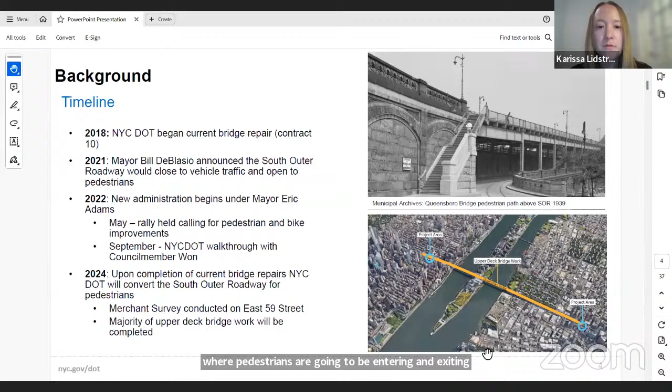The street level improvements are really about certain goals and objectives we have for those. Some of them are creating a pedestrian network that is accessible, safe, and convenient.

While we're not relocating where bikes will access the North Outer Roadway, we do want to think about the existing bike network and any enhancements that can be made. We also want to think about local access to these streets for businesses, residents, and any city facilities along these routes.

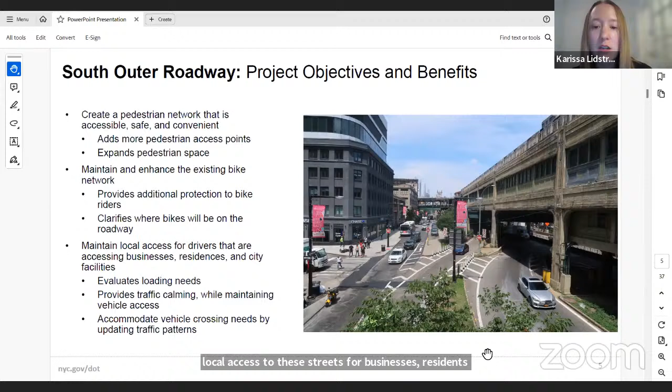We also have about 2,800 people who walk over the bridge daily. That number might be higher if the conditions felt more comfortable to walk across.

The South Outer Roadway currently has one travel lane taking vehicles, primarily passenger vehicles, because there is a height restriction from Manhattan to Queens. The number of vehicles that use this route per day is about 8,000, which is actually less than the combined total of pedestrians and bikes using the North Outer Roadway.

Now we'll take you into the existing conditions on the Manhattan side before getting into our proposal.

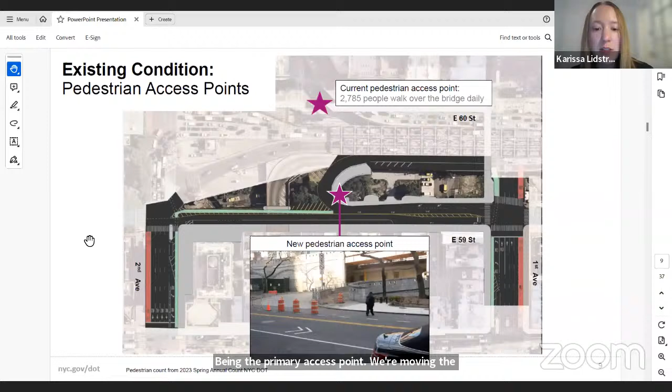Let me orient you a little bit to this. We're looking at a plan view, mostly of East 59th Street, bordered on the right-hand side by First Avenue, and on the left by Second Avenue. Currently the pedestrian access for the bridge is on East 60th Street, and with the South Outer Roadway being the primary access point, we're moving the pedestrian entrance to East 59th Street. You can see a photo of that existing condition today.

Taking a closer look at the sidewalk conditions, we do have some narrow sidewalk widths per our pedestrian mobility plan guidelines. Currently they're about 15 feet, but it depends on where you're walking along the sidewalk and what street furniture or permanent objects protrude from the building line, like stairs. Because we have only one continuous sidewalk along the south edge, that creates one crossing for pedestrians at Second Avenue, which facilitates a busy intersection since that's the only pedestrian crossing.

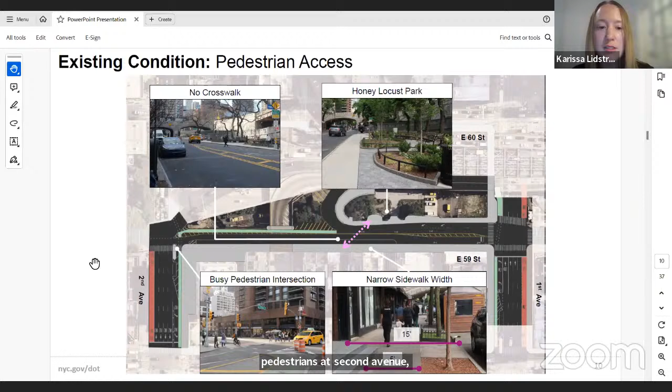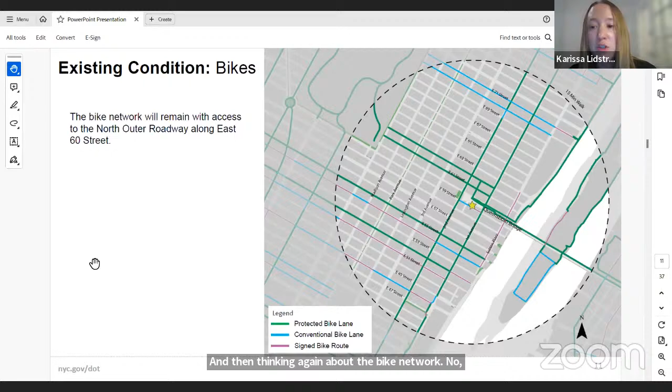Thinking again about the bike network, we're not relocating where bikes enter the bridge, but we want to be thinking about the existing network and enhancements that can be made. Looking at existing conditions, there's a high number of bikes that use 59th Street to access southbound Second Avenue. Instead of coming down at the mouth of the bridge, bikes will take 60th to First, then 59th to Second. Current conditions along 59th Street for bikes involve a shared travel lane between bikes and vehicles accessing the South Outer Roadway.

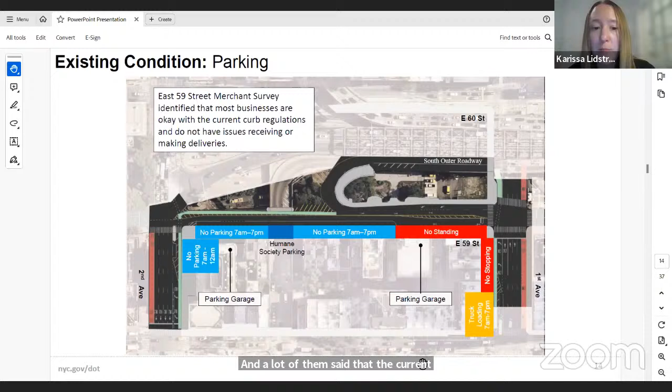All right, so now we are going to transition into our proposal.

Looking at 59th Street, I want to start by pointing out some of the pedestrian improvements we're making. As I mentioned, the sidewalk doesn't go all the way between First and Second Avenue on the north side, so we want to install a painted sidewalk along the northern curb of 59th Street. When pedestrians come off the South Outer Roadway, they'll use this concrete sidewalk facility, and then as they exit, they'll have a choice to go to Second Avenue or First Avenue. We want to create a facility for them.

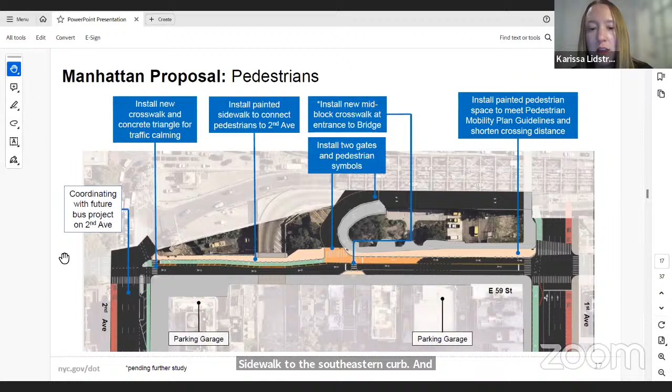We're also exploring a mid-block crossing at the entry/exit point of the bridge, located here, and a crossing over at Second Avenue to get from the new painted sidewalk to the southeastern curb. Because the eastbound direction is already low volume, we want to facilitate this as a local access route and a low volume street. We also want to add a few traffic calming elements at the entrance to Second Avenue by building a small concrete triangle, and adding a painted curb extension mid-block as well.

And then taking a look at both the bike and vehicle improvements along the route. With the South Outer Roadway closed, we can remove the left turn bay that's currently on First Avenue and widen the existing bike lane on First Avenue, and also extend the truck loading that's there. Because the street will be a lower volume street with this turn, we are keeping it two-way up until the parking garage.

After that, the orange color highlighted here will be a shared space between authorized vehicles only and bikes. As I mentioned before, there are three DOT facilities along the northern curbs, so we still want to have access there. Our bridges team at DOT will be installing a gate here for their maintenance access, and also to prevent vehicles from using the South Outer Roadway.

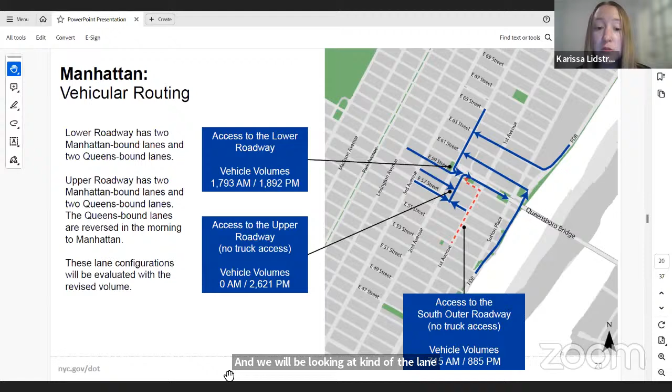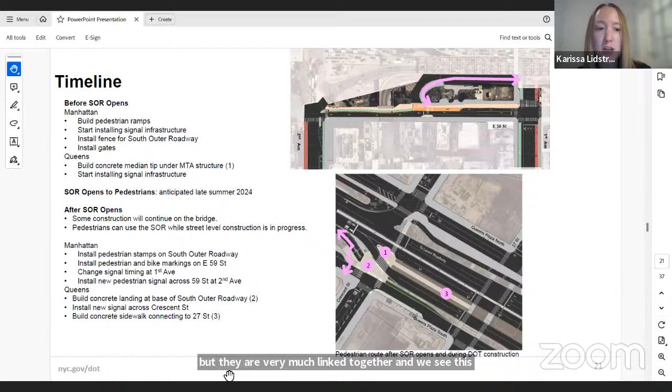This goes into a little bit about the Queens side of the bridge proposal, as well as the Manhattan side, but they are very much linked together, and we see this all as one holistic project. And that's our proposal.

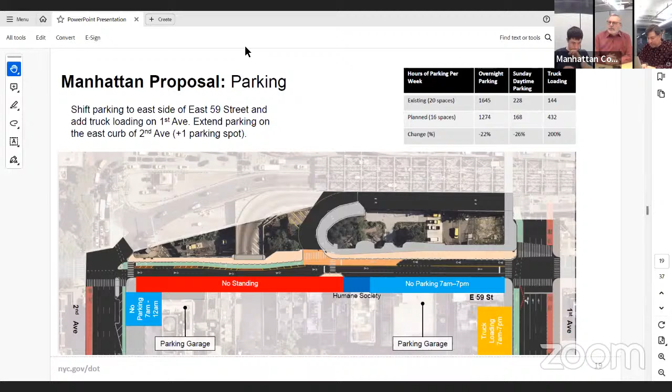It may be used now for some bridge maintenance, but it might be worth taking a look at some portion of that area that could be repurposed for creating a large facility for the deliveristas to recharge and be out of the elements. It's sheltered, and it might actually serve multiple functions in addition to what it's currently being used for.

Okay, maybe you can send me the exact location or a screenshot of the photo, and we can probably have a walkthrough of it. All right, you can see it. Karissa, it looks like you're acknowledging it.

Are you talking about right over here, where you go up the south outer roadway, and then right where the garage is? When you have that picture with the trolley track from 1911, you can see the place where one trolley track comes up the ramp, and the other one comes out of the garage.

Right, yes, our bridges team does use that facility for maintenance and storing vehicles and different elements. Yeah, we do have a bridge facility in that area. They do use that.

So the question is this: is it conceivable, since that's going to continue to be used and you're going to have to manage getting vehicles in and out of there somehow without interfering with the bikes, that you could discuss this? Larry, we can look at various options. Let's look at this and we'll definitely get back to the community board.

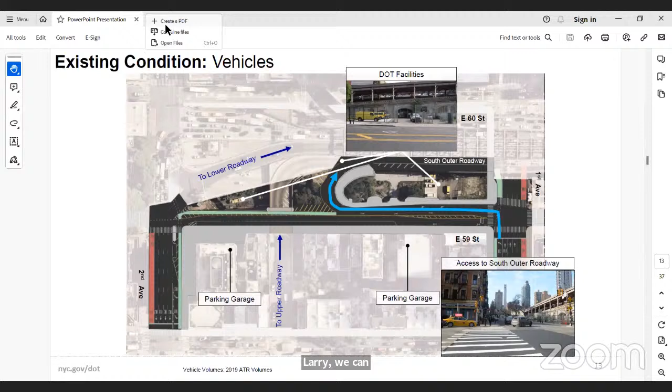Larry, so you're saying use that for deliveristas to rest area? Well, there are two things. One, you have this garage door, this maintenance facility. Nothing's been mentioned about how that function will interact with the pedestrians coming up and down off the bridge. So I think they did.

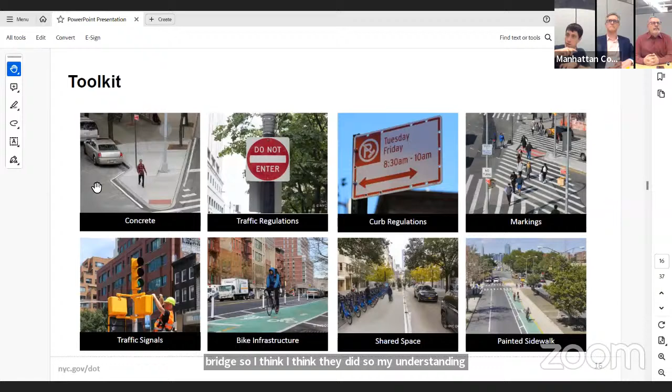So my understanding is you've got that sidewalk path, the gray area, and that's going to be the entry point for pedestrians. That gets you past the door, the entryway. Where the gray area ends, it comes around the ramp to the right. You see that blue dot?

Okay, so that's our... there's a white line, that's the garage door. No, the garage door's back behind that. No, that's where it's over here. The garage door is, oh sorry, yes, not where the blue dot is, where the outline ends. The garage is to the left of that vertical white line there.

No, I don't, sorry, hold on. Can you see my cursor? The garage door is here, and then this new gate that our bridges team will be installing as part of the project.

So pedestrians will actually be accessing the space you see here, and then they'll be directed to use the current concrete sidewalk path that goes up. Okay, focus on the new gate. My question here, first question is, how will service vehicles get in and out of that garage if this ramp is shut off?

So there's going to be the gate here as well as down here. Our DOT vehicles will pull up to the gate, they'll have to move it, and then they'll bring their vehicles up the existing ramp. So I'm assuming that's the roadway, and then the pedestrian area is the grayish space to the right of the ramp.

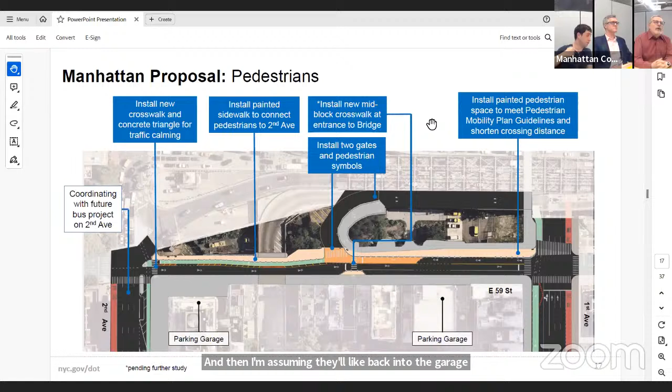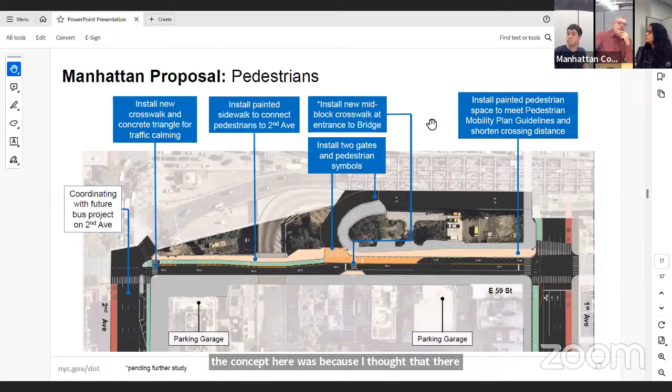Okay, because I completely misunderstood what the concept here was. I thought that there was a retaining wall on the right side of the ramp as you came up, and there isn't any space where that gray area is. Let me go back. Do you have a photograph? Yeah, I think there was a picture. Where's the SOR photo?

This one. So this is going to be the new pedestrian path, or it's existing? Oh, okay, so I didn't realize this is the retaining wall I think you're mentioning, and then Honey Locust Park is literally right here. Okay, so there's the ramp, the driving ramp, and then there's a walkway, which I hadn't viewed before.

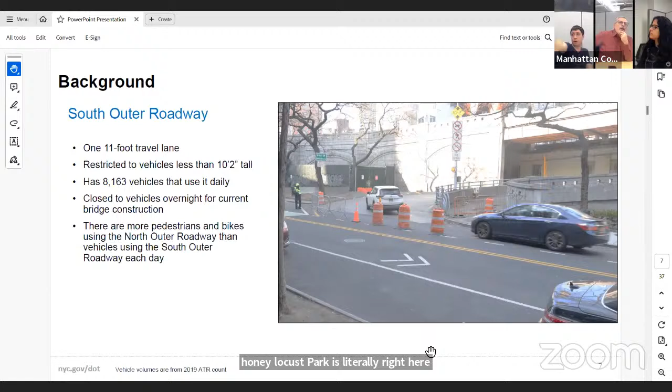Yeah, so that's still going to be a roadway up to allow access for that garage. Okay, but it's not only for... but there'll be a gate right here in the future. But what I'm asking you to do is, and now I'm rejiggering it in my head...

...is still consider the possibility of allowing the deliveristas to use that vehicular ramp to come up, and if there's space, maybe even outside of the garage, but between the new gate and the garage door, to have some sort of place to hang out.

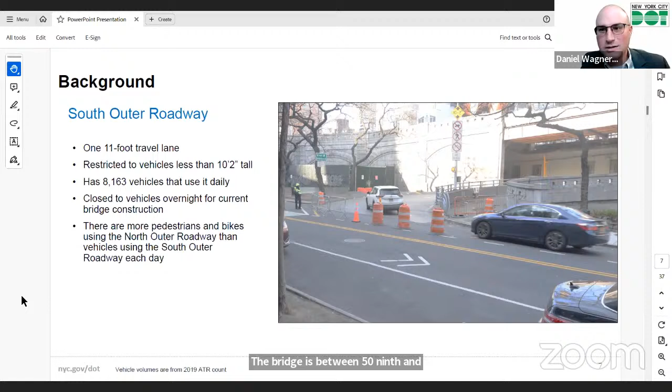We can take that back to our bridges folks and see how they would respond to that proposal. But I do want to point out that you were asking for a Deliveristas hub in your district, and that is not in your district, that's in CB8. Well, the south side of the bridge is in our district. The boundary is 59th Street, and the bridge is between 59th and 60th Street. I mean, it's nothing really in terms of a deliverista needing rest and respite. But if you still want one in your district, I don't think that would solve it.

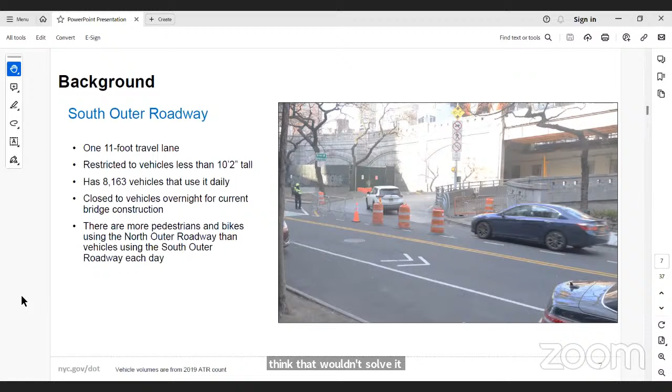Yeah, why not both? We're happy to take this back and work with the community board to find suitable locations for the deliveristas. So let's continue the conversation with that. Listen, this was just a brainstorming idea, not a concrete proposal. We don't know if it's feasible. Okay, let's move on. Okay, I'll come back later.

Hey Carissa, thank you, it's a great presentation. I just wanted to comment on the 11-foot width of the north lane. I went out and measured it last weekend, and on the Manhattan side it goes down to 9 foot 8 inches. That's where cyclists are getting speed as they're coming from Queens, and it's really tight for pedestrians and cyclists going two ways. It's a pretty dangerous situation, and it's been like that for a few years.

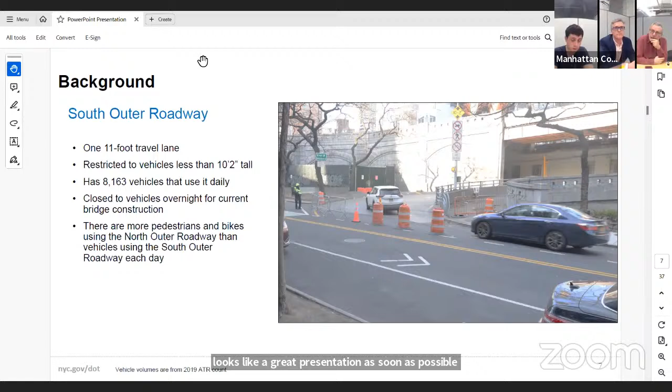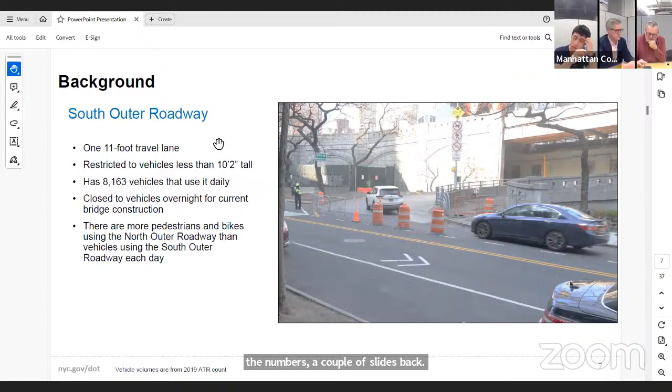So my point is, I'd urge you to make this change as soon as possible. Thank you. I'm gonna ask one question. When we looked at the numbers a couple slides back on bicycle volume versus car volume on the outer roadway, I'm assuming those are average numbers. I'm assuming there's large variation in bike and pedestrian access on the bridge in the colder months, whereas the auto traffic stays fairly steady throughout the year. So in the summer months, my assumption is the bike volume far exceeds the auto volume on the South Outer Roadway. Is that a correct assumption? Right, the bike numbers are the average for the year, so you could be correct that the summer volume is higher than the 7,000 you're seeing here.

Great, cool, thanks. Okay, couple of questions. I'll go Michael, right? Yep. You can just, they should be able to hear you. No, you can come over here. Yeah, then you'll be on the camera, you can sit in front of the camera. Yeah, you're welcome to take the seat if you'd like it.

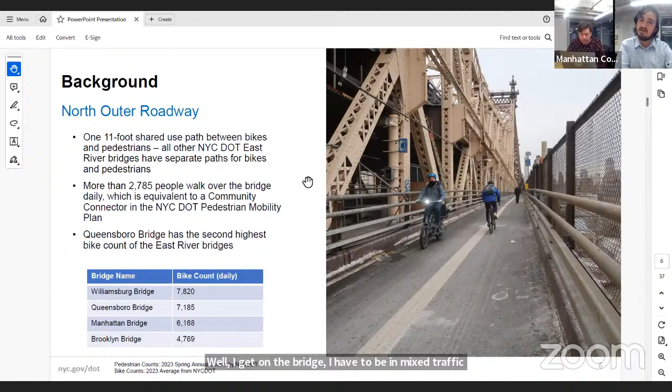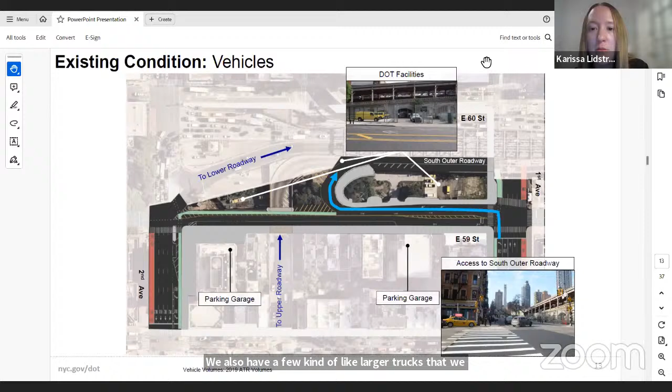Hi, my name is Michael Cohen, and I had a question about the bridge access for bicycles. When they get on the bridge, they'll have to be in mixed traffic with authorized vehicles. I don't know what those authorized vehicles are, but this sounds a lot less good than what they currently have for a shared path on the bridge. I wonder why a bike lane couldn't be installed just for bicycles. Are you referencing 59th Street or the North Outer Roadway? The south outer, the outer roadway, there will be a lane for bicycles and authorized vehicles only. Is there any way to make it safer for bikes? Yeah, the authorized vehicles, you can see some DOT vehicles in this photo, this yellow van. We also have a few larger trucks we use, as well as pickup trucks. In the proposed section, this would be the authorized vehicle space that would be shared. I think daily it really ranges for how many DOT vehicles there are, but I'd say there's less than 50, so you're not going to experience a lot of vehicle activity for that westbound movement as a cyclist. Thank you.

All right, Larry, I'll come back, sorry. I want to answer, let's jump in. Actually, go ahead Larry, sorry.

Are you planning to review the health of the electrical and lighting systems on the bridge? Currently on the north side, a lot of lights are out for extended periods of time. We're afraid, obviously, when you add the pedestrian feature on the south side of the bridge, that not having adequate lights is a safety issue as well.

We can definitely evaluate the lighting on the North Outer Roadway. That's a good flag. Our bridges team will be making some improvements when they install the fencing on the South Outer Roadway, as well as the pedestrian stamp markings. We'll also alert them to make sure there's all the appropriate lighting.

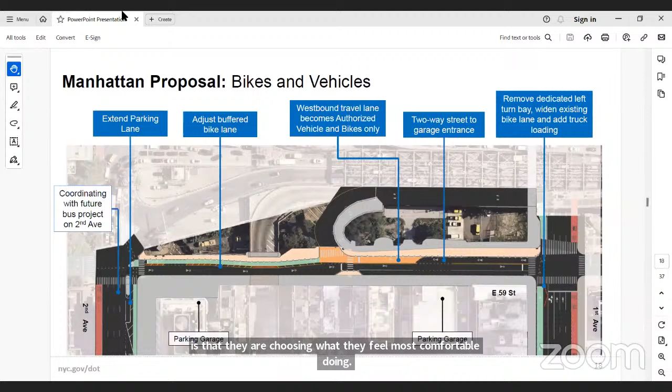Thanks. I think mopeds are supposed to have a license plate, registered with the state, but I don't know this for sure - I didn't come prepared to answer questions about classifications and definitions of mopeds. Generally speaking, if you have a license plate on your vehicle, you're supposed to be on the main vehicular lanes of the bridge. I think what you're seeing with those mopeds is that they're choosing what they feel most comfortable doing. And your suggestion isn't a bad one - it's the first time I've heard it, so we'd have to take it back and look into it.

Okay, I've got one more question, then let's move on. Something that was noted on Second Avenue was that there's an additional parking space being created. Maybe it's a minor detail, but I'm curious why and how that came to be, why it's needed, and how that was possible.

Yes, we are considering extending that parking space there because in our proposed design, we're acknowledging that the section between Second Avenue and the mid-block is becoming no standing anytime. While that permits really quick pickup and drop off at the curb, it doesn't allow for the loading, unloading, and access to the building on the corner. So we wanted to alleviate some of those concerns by trying to extend that parking there.

Would that be better served as a loading zone then, not as parking? Yeah, that's definitely a detail we haven't worked out completely there, but we can take that suggestion back to our team to evaluate.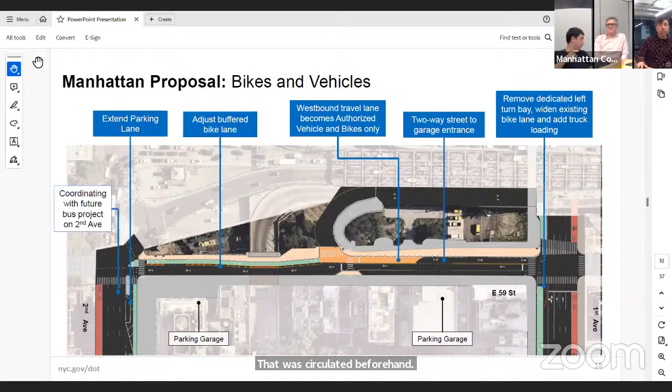We call for a vote. So we have a resolution that was circulated beforehand. I think you can propose the motion. You would need to make a motion to propose the resolution for a vote. Second. All right. So now we have the resolution, which Brendan, can you share?

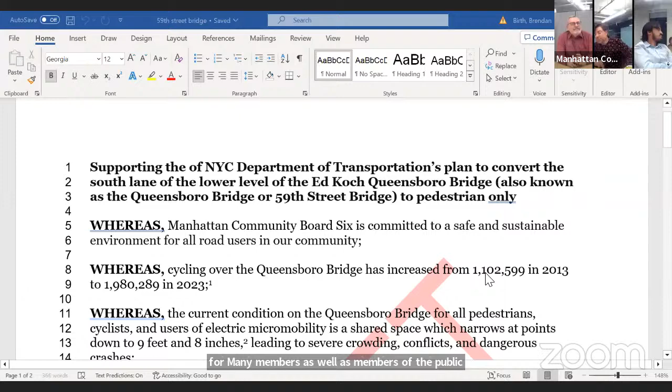Yes, I will do that right now. I did send it to committee members ahead of time, but for committee members as well as members of the public watching from home, this is the draft resolution. I'll scroll down to the resolve clause. Do you want to give a quick overview summary without reading the whole thing?

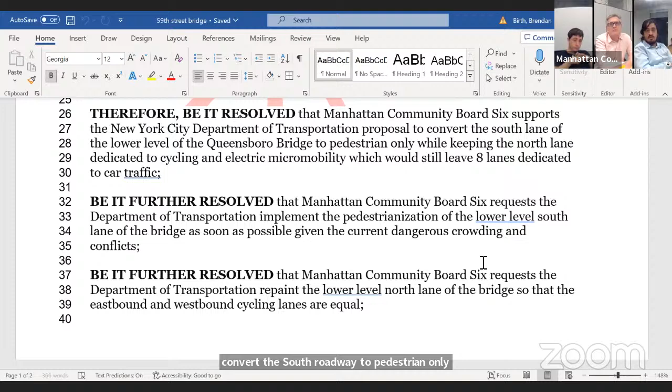Just basically that we support the DOT plan to convert the south roadway to pedestrian only and to do it as quickly as possible, and to restripe the north lane, as they said they would, to make the lanes equal in each direction, and to do it as quickly as possible.

All right, so let's open up for any questions or discussions on the resolution. Is there any way to reference some of the suggestions we've had tonight? Do you have specific things you would like to make a motion to amend? Well, I'll give you a minute to come back. I'll come back to you. Does anyone else have anything? I'm not dismissing you, but I'll come back. Does anybody else have anything they want to raise?

Sorry, I was not trying to... Okay, Larry, do you have? Yeah, we could also come back. Okay, I just want to, if somebody can...

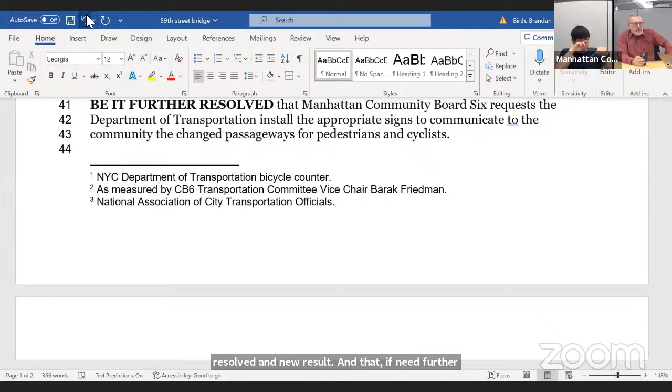Brendan, if you can, just quickly put on the screen a couple of words before we flesh the ideas out. Just when we're on the screen, with respect to the new resolve: and that it be further resolved that Manhattan Community Board 6 requests consideration of the following further improvements. And then anybody else can chime in if they want to add a particular idea that was raised earlier in the meeting. Just anything you wanted specifically? Yeah, okay, just setting up.

Following additional improvements. Additional improvements. Thank you. Observation slots in the fence, in the fencing.

Another one would be appropriate signage at First Avenue and East 59th Street to warn vehicles that the roadway west of 59th Street is no longer an approach to the 59th Street Bridge. Third, additional signage that will help segregate cyclists from pedestrians so that they no longer mix as they cross the bridge.

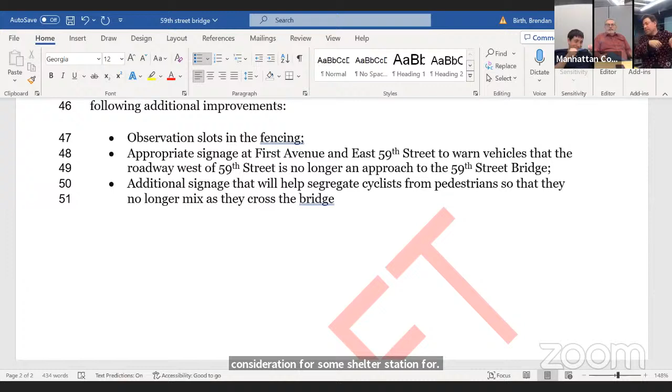Well, all of this - well, just in terms of the fencing, that's on the bridge. Fair enough, I'm fine including that. Inclusion of a delivery worker rest area would be... in the vicinity of the maintenance garage on 59th Street, accessible from 59th Street.

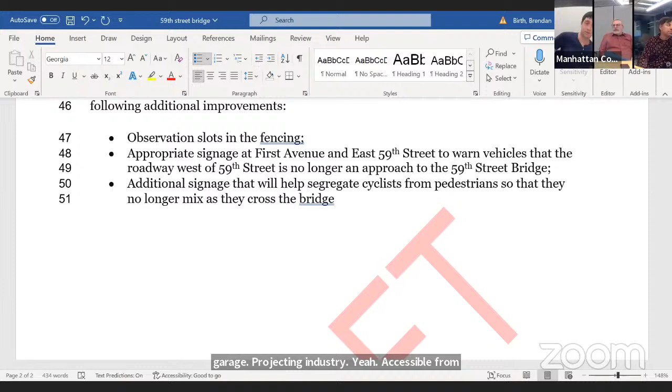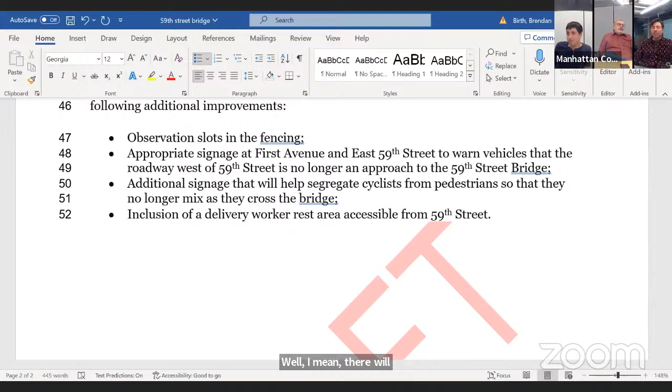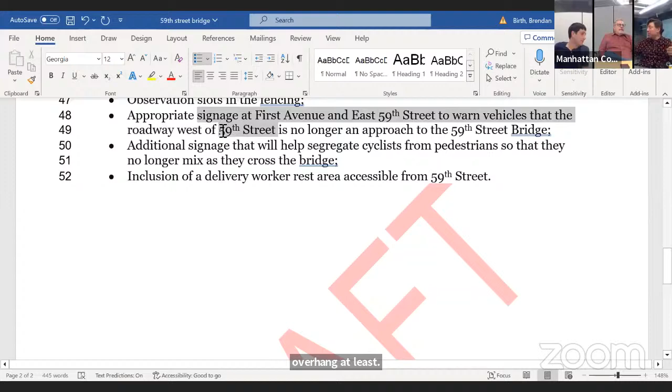Okay, yeah, can we add - then how would it be worded? Inclusion of a delivery worker rest area, accessible from 59th Street, in the vicinity of the maintenance garage. But I think we could just say - I'd rather give them the latitude to put it where they feel most appropriate. Well, I mean, it would be a sheltered delivery work area - that's the key, that it's under an overhang at least. I would say give them the sheltered latitude, and give them latitude, because maybe they'll be guided by the language. Okay.

So the inclusion of a sheltered delivery worker rest area accessible from 59th Street. Just add the word sheltered before the word delivery, Brendan. Right there, before delivery, insert sheltered.

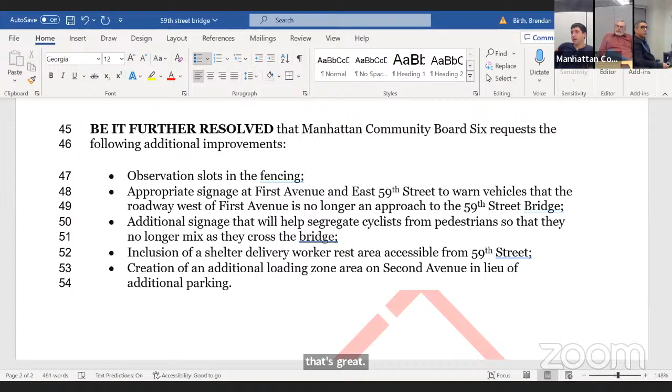Gabe, did you have an addition? Yeah, real quick, piggybacking off that: creation of additional loading zone space on Second Avenue in lieu of parking. Note they've added some delivery space on First Avenue. So, creation of an additional loading zone area on Second Avenue in lieu of additional parking. Maybe specify Second Avenue and 59th Street, to be clear exactly where.

Mary, did you have anything? I'd like to make sure we don't wait too long. I think we're getting too detailed. I can see what we're putting up, but we shouldn't lose sight of the fact that we're delighted with the proposal. These kinds of details can be worked out afterward, so I'm for more simplicity. We already have five additional items, and we risk losing support for the proposal the more we add.

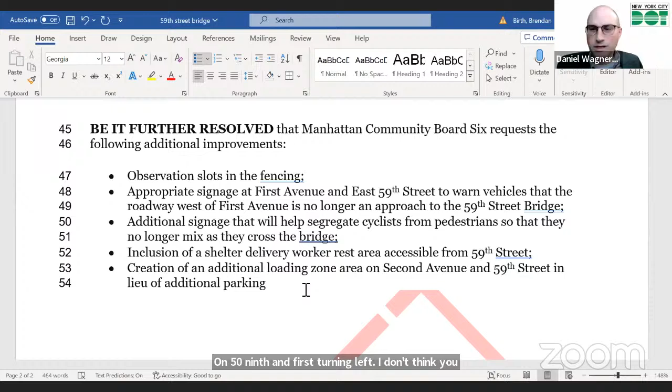I agree, I don't think we should micromanage this, so we should be mindful about how much more we add, if at all. I was going to add one more thing, but then I heard that and thought I'd withdraw it. Well, what were you thinking? On 59th and First, the cyclists have a split phase signal, so you only have a short time to go forward. It shortens the cyclist time, and now that there won't be much traffic turning left on 59th and First, I don't think you need a split phase signal. We can just chime in on that one and say it'll be handled, you don't have to write it out.

Well, I move this amendment. I think we need a second for the amendment. I move the resolution as amended so we can vote on it. Okay, you're calling the question. Yes, assuming we have a second. Yes. All right, then let's go to vote on this resolution as amended.

When I call your name, please say whether you're in favor, opposed, abstain, or not entitled. Bea Disman, in favor. Rob Friedman, in favor. Jason Froimowitz, in favor. Miriam Rowe, in favor. Larry Shire, in favor. Dave Terzo, in favor. Jerry Weinstein, in favor. With all seven committee members present in favor, this resolution passes. Thank you very much.

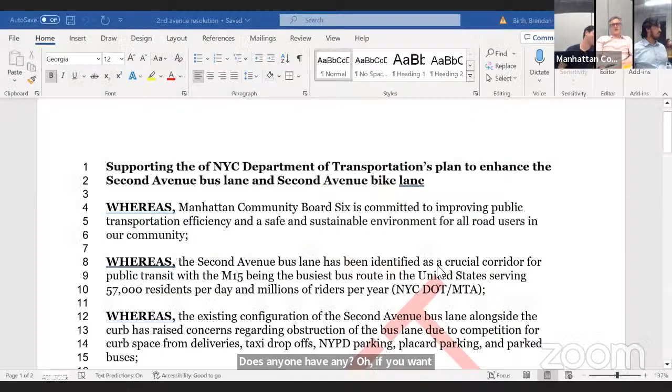All right, we'll move on to the next item on the agenda, the resolution on improvements to the Second Avenue street design, which was also shared ahead of the meeting. Eddie, if you want to give any sort of intro. If everybody recalls, last time we voted unanimously in support of the DOT proposal to offset the Second Avenue bus lane and widen the Second Avenue bike lane.

There were so many good suggestions here last time, and we tried to incorporate them all—things like offset crossings, hardening pedestrian islands, increasing the number of delivery zones, and things like that. We listened to all the suggestions this board made last time, and I think we have a better resolution than we would have had if we'd rushed it through. I think it was a good decision to wait till now.

One thing I recall we added, that wasn't discussed in the meeting, was asking for the bike-vehicle merging zones to be replaced with offset crossings on Second Avenue. It wasn't specifically addressed, but I suspect it would have come up anyway—those have been shown to be less subject to conflict and safer.

Jason, for the benefit of people who don't understand what an offset crossing is, will you flesh that out? Okay, so really only in the section of Second Avenue north of 42nd Street do these still exist. The merge zones are basically an area where you have left turning traffic, and the turning lane effectively merges with the bike lane, and bikes are supposed to merge with the vehicles.

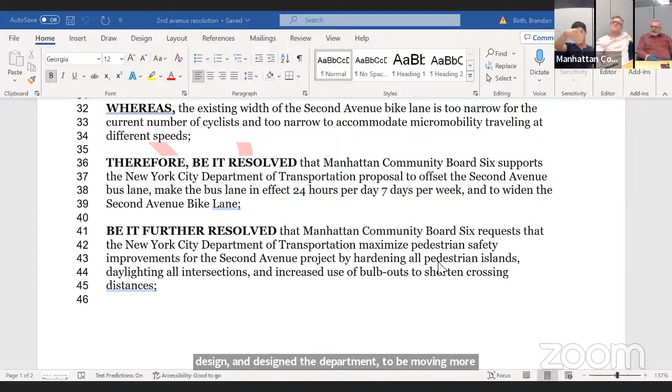The design that the Department of Transportation has been moving more towards is this offset crossing design, which requires cars to make a sharp turn left, slow down and effectively stop and yield to the bikes that continue through. Personally, I find that to be a much more comfortable design when I'm biking.

Thank you, Jason. Call the question. Second. All right. Okay, when I call your name, please say whether you're in favor, opposed, abstain, or not entitled.

Bea Disman, in favor? Rob Friedman, in favor. Jason Froimowitz, in favor. Marion Ruff, in favor. Larry Shire, in favor? Dave Terzo, in favor. Jerry Weinstein, in favor. With all 7 committee members present voting in favor, this resolution passes.

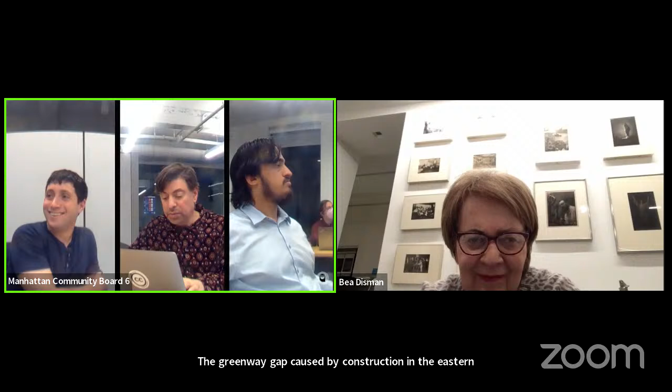Moving on to number 3, which is discussion of potential weekend FDR lane closures during summer to mitigate the greenway gap caused by construction on the East River Park. That was a mouthful. I have a brief presentation prepared, which was also sent around, if this looks familiar.

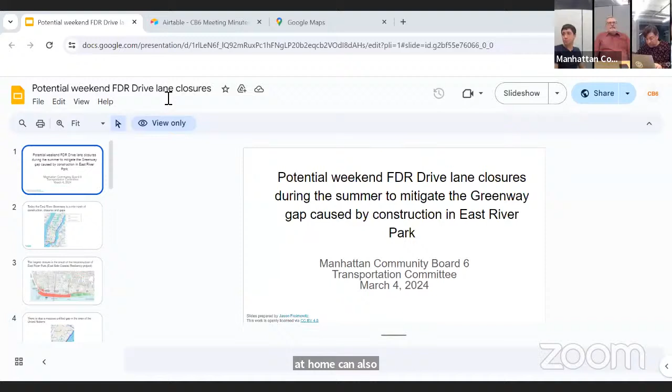So a brief introduction while Brendan's pulling it up. I appreciate this is a little bit of an ambitious proposal, but I'm interested in feedback of the committee on if it's too ambitious for us to pursue, general thoughts or ideas on it. I like to live by the idea that if I'm not being told my ideas are crazy, I'm not pushing hard enough. So that's kind of what's going on here.

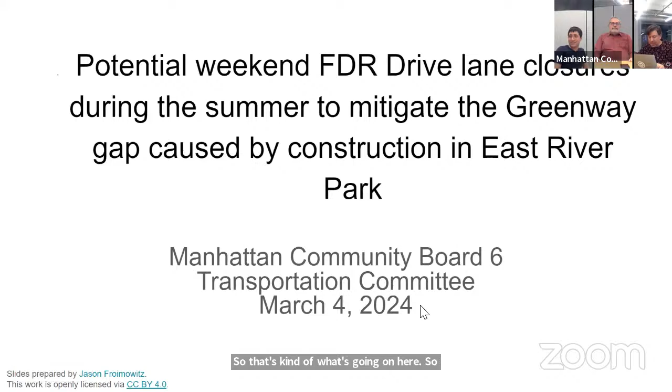If you go to the next slide, please. All right, so basically setting the scene in terms of what the East River Greenway looks like today: it is a disjointed mess. You have sections that are open, sections that never connected fully to make it a full greenway.

You have sections that are closed for construction, sections that are under construction but are open. Much of the burden of the closure is on the southmost portion of the Greenway. The gap is squarely within our district by the UN. We never had a full Greenway connection over there. The Greenway just ends and cyclists are expected to use the roadway, and pedestrians too.

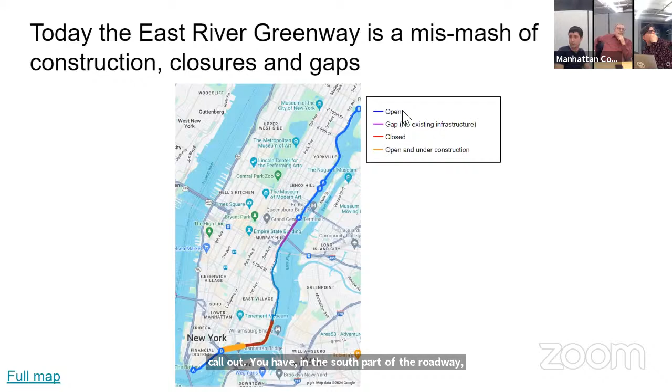And so when you look at the bottom section, just a note call out, in the south part of the Greenway there's an area that's so far under construction, and then you have a large block that's completely closed off.

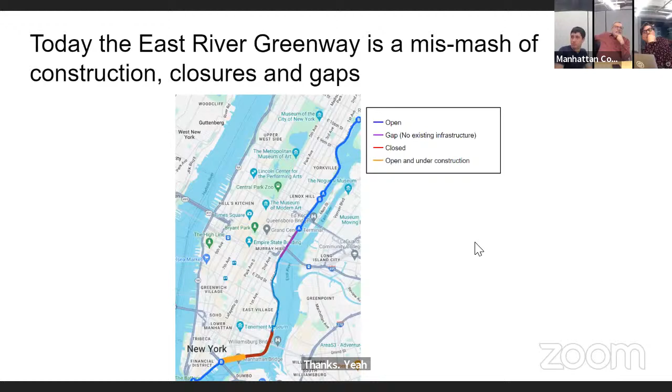Thanks. Yeah. We could go to the next slide, please. So the source of the closure and a lot of the lower roadway disruption is the East Side Coastal Resiliency project, which I will not attempt to abbreviate.

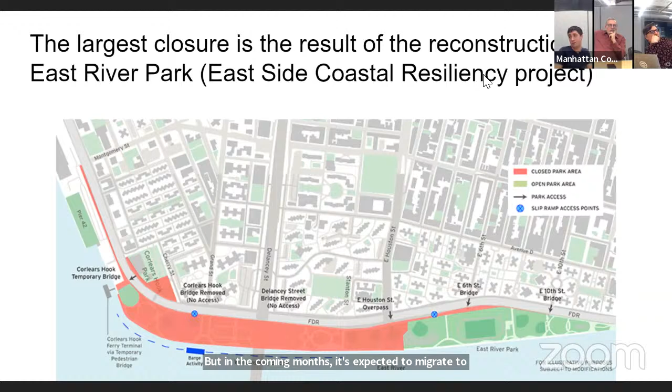Basically, this is work that's going to be continuing into the next 3 years, in different phases. This is where it's currently closed off, but in the coming months, it's expected to migrate to more closures on the north side, with this section reopening. Next slide, please.

And also, we have this massive gap I mentioned before, the UN, within our district, where you have to detour to First Avenue to be able to continue up to the beautiful new section, which is on my next slide.

So we're making progress here. There are 2 beautiful sections that have reopened recently, and I think it's important to call out the good that's been happening on the Greenway. On the left, we have Stuyvesant Cove, which is lovely, although I'll note it's not fully connected in that the north part of Stuyvesant Cove is now a dead end. If you're trying to continue through as a throughway, you have to make sure to leave Stuyvesant Cove or never enter it. But anyway, it's really quite nice.

And on the right, you have the new section on 54th Street, I believe it starts, that's where the 59th Street bridge is, and set in place. Yes, really terrific. If you haven't checked it out, you absolutely should. So we're making progress, but we still got a ways to go. Next slide, please.

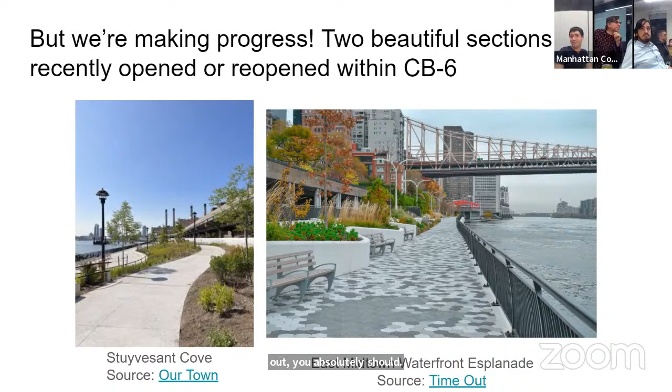Go ahead, next slide please. So as I highlighted, it's a huge mess for pedestrians and cyclists, but traffic has not been impacted or inconvenienced at all by the East Side Coastal Resiliency Project. There have been no lane closures. This is street view, but it is the current condition. We continue to have 3 uninterrupted lanes of traffic in both directions, 7 days a week. Despite the massive inconvenience that all other road users have faced as a result of this project, the traffic is unimpeded.

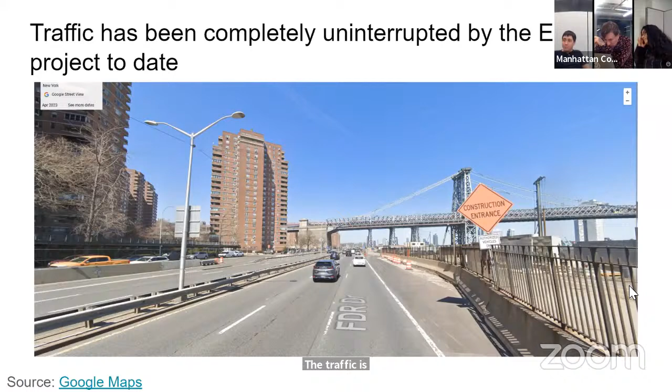Next slide please. Just to reiterate, this is going to be going on for a while. We're a bit into it, but we're expecting this to continue into 2026. Next slide please.

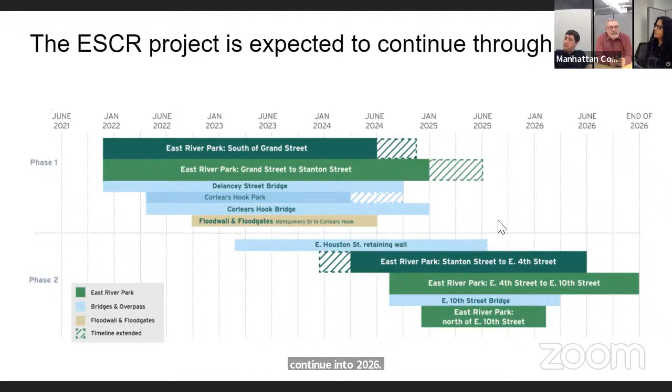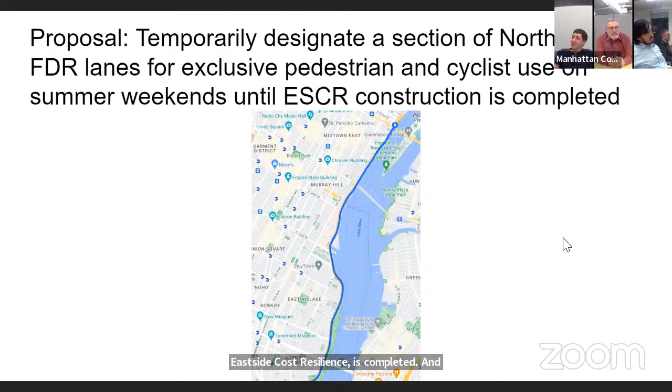All right, so I am proposing that we temporarily designate the northbound FDR lanes for exclusive pedestrian and cyclist use on summer weekends, until the East Side Coastal Resiliency project is completed. And here's how I would go about proposing doing that. Next slide please, thank you.

So you would still have traffic that would continue. We would still be able to support traffic in the northbound and southbound directions, but obviously at a lower pace. Notably, as we're talking about weekends, this wouldn't be a 7-day-a-week solution. This would be for weekends where we have lower traffic volume, and also emphasizing that this would be a temporary measure as part of the closures we have due to the park construction. Next slide.

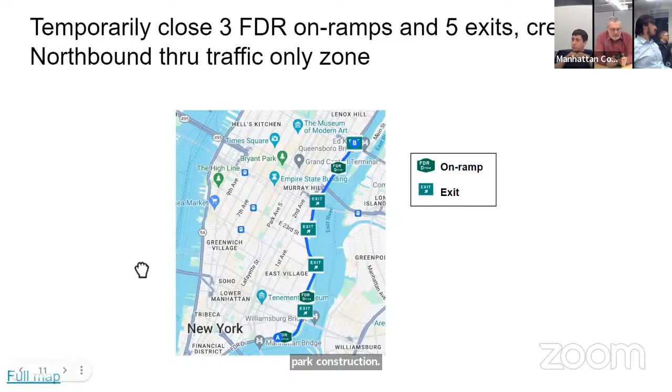And so this would cause some other changes with traffic as well. If we're moving all the northbound traffic into the southbound section of the roadway, it would basically create a through-zone-only section in the closure area, where we would have 3 on-ramps that would be closed and inaccessible, because you wouldn't be able to get the northbound traffic into that other lane. And you would close off the exits. So you'd create this kind of expressway through much of Midtown, which I appreciate would require adjustments for traffic.

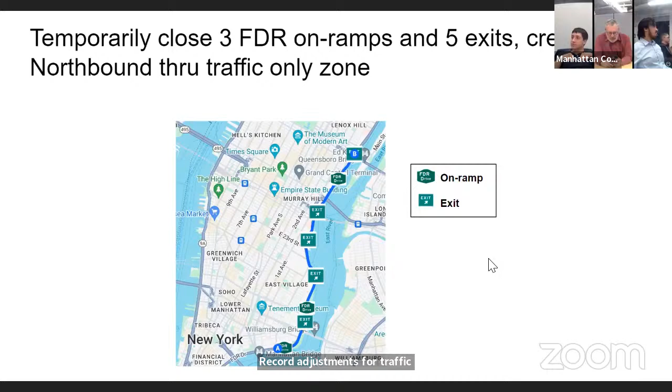Next slide please. There would also be some minor construction necessary, I think, to break through the barriers to allow for that transition zone to be created at the north and south ends.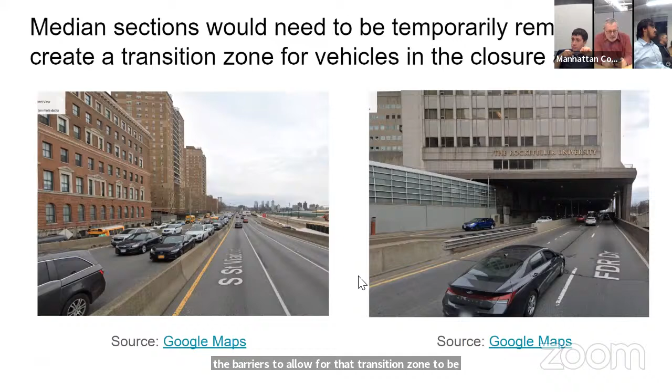Next slide. Also, just to call out that there is precedent to do this. We already have full or partial closures of the FDR on certain weekends and holidays, and to my knowledge they don't create any major traffic disruptions. 3 key events, there may be others: you have the New York City Half Marathon in March that just happened recently, the Independence Day fireworks on a big holiday where we shut down the FDR, and then we have the 5-borough bike tour in May.

And yeah, I would love to hear everybody's feedback. I don't think we're going to vote on this tonight or anything like that. I would just love to hear what people think, if this is something there's interest in continuing to discuss and move forward — feedback, changes, suggestions on the plan. I'll open it up. Larry?

Just an additional use of the FDR Drive for non-vehicular purposes — a number of years ago, there was an Ekiden, which is a mass relay race very popular in Japan, where high schools and universities participate, and the FDR Drive was closed for that. Yeah, I think that still goes on actually, but I don't think they close the FDR for it. Interesting.

I love the idea and I think it's fantastic. I don't know if you're able to go back to where you see the FDR going in both directions — that's the one thing I think is hard. Are you able to go back to that slide, Brandon, where the FDR shows people going in both directions on the FDR? Yeah.

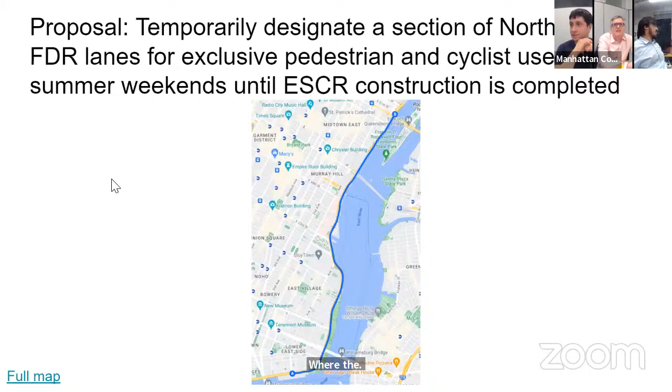That seems to me hard to achieve, and I don't think those other events do that. They do not, I think they just kind of leave that as the southbound lane. Yes, correct, which I think is a lot easier to do.

Moving highway traffic over so this other car can come through is the only thing I would slightly tweak about this, but I think there's precedence for it, because for Summer Streets we don't have anything in CB6 and it's only 3 days, such a short period. Why couldn't we have an extra 3 days of Summer Streets? The problem with Summer Streets is you need all these people patrolling all these intersections, so it's so expensive. Whereas this, you don't need that, and I think it really is fantastic.

A couple things. When I was originally envisioning this, I was trying to come up with a solution that didn't entirely shut off all northbound traffic. My original thinking was limiting the northbound lane to 1 lane, allowing traffic to continue at a reduced speed, and setting up barriers of cones and some other way to separate pedestrians, cyclists and vehicles continuing to travel northbound. Some feedback I got was that this would be potentially dangerous, and that this was a safer solution for bikes and pedestrians. There is precedence for that as well.

Perhaps a slightly different context, but we do contraflow on the Queens Midtown Tunnel, where I think there's cones that delineate both directions. I think they just use cones during construction. There's a truck that moves these massive delineators all the way, it's like a real barrier. In the tunnel itself they're much narrower than traditional cylindrical cones. But just to say that we do contraflow and adjust the direction.

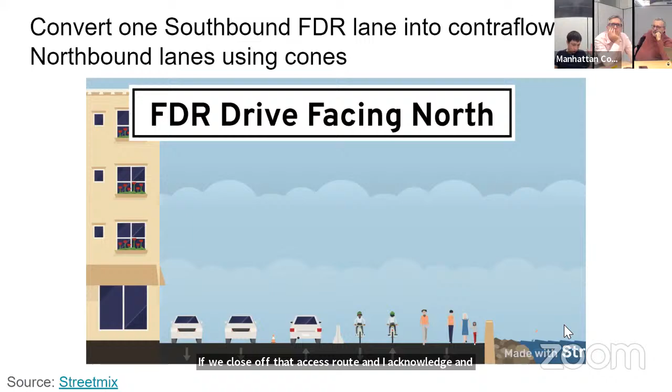Okay, let's move on, unless there's any objection. Last item, or almost last item, on the agenda is parking regulations in front of Trader Joe's on Third Avenue between East 31st Street and East 32nd Street.

They get deliveries 7 days a week, up until as late as 10 PM as I understand. Monday through Saturday, the curbside is a commercial vehicle loading, no parking area, until 7 PM. But that leaves Sundays for regular parking.

On Sundays it creates this problem where they're still getting deliveries, and because cars are parked there, the delivery vehicles park in the travel lane, creating traffic and hazards to the people trying to unload the trucks, and hazards to the vehicles parked there where cargo is being unloaded next to them.

So there was an ask from Trader Joe's management if we would be able to ask DOT to extend the parking restrictions in front of their store, to allow for a designated parking or loading area on Sundays, as well as extending the time from the existing 7 PM to 10 PM.